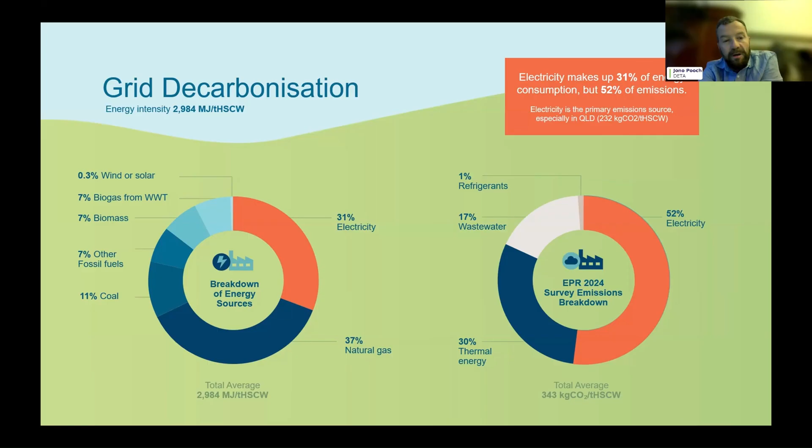If we look then at that breakdown of the thermal, a lot of that is natural gas and coal, but we do have some renewable sources as well through biomass, biogas, and wind and solar. What we've seen over time is that renewable portion is growing all the time, but obviously there's a lot more work to do.

From a sector performance, how we've performed over time, it's actually a really good news story. Over the last 20 years, the average emissions have reduced by around 45% per unit of product. That's a great outcome - it's something that we don't actually talk about very much, which again references the need for us to communicate this a little bit better to our key stakeholders.

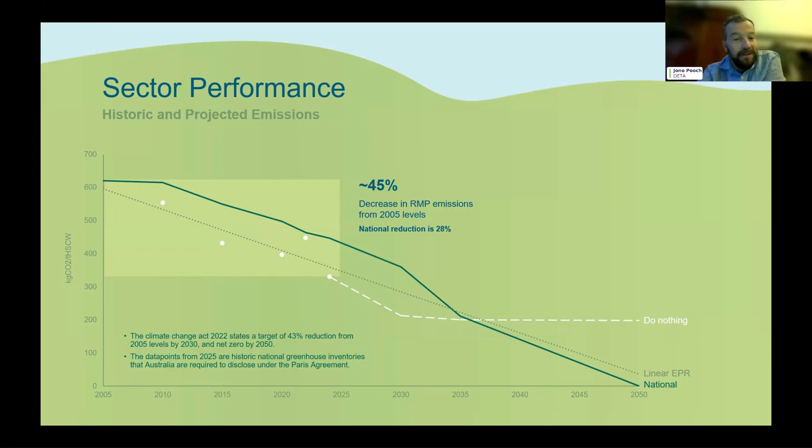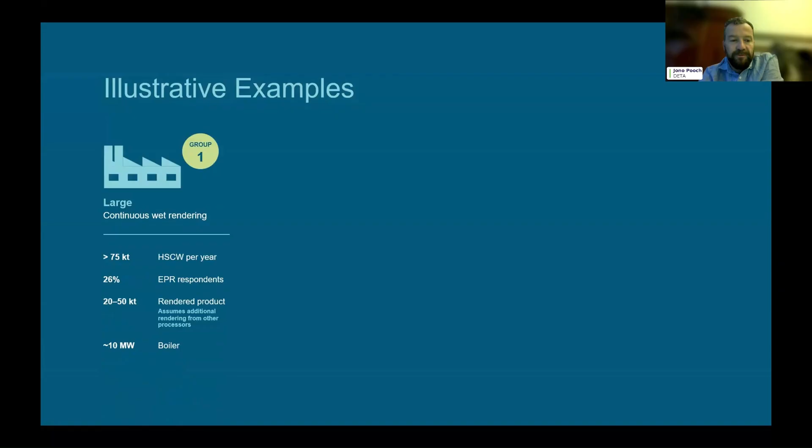Going forward, if we do nothing else around efficiency or process change, we will see some further improvement, mainly from the greening of the electricity grid. But what we are also showing is that just doing nothing, not surprisingly, is not going to get us all the way down to a net zero future. So what we're trying to do is lay out what those steps should be for different process users to get to net zero by 2045 or 2050.

So what we've done is we've basically split the industry into four key archetypes, as we've called them. We've got a large archetype, which is continuous wet rendering, more than 75,000 tonnes per year of production. It covers around 26% of the industry, or the responses that we get from the industry, and they've got around a 10 megawatt boiler. We've got a medium batch rendering type size, around a 6 megawatt type boiler, covering around 44% of the industry or responses. And then we've got medium, and then we've got small.

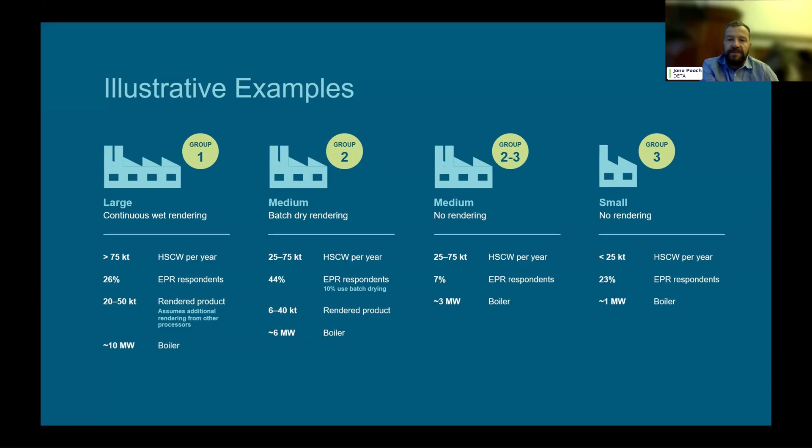As you can sort of see, what we've tried to do is not necessarily say this is a specific roadmap for a specific site. What we've done is bundled sites into four, and then hopefully from a reader perspective, they'll be able to identify with a particular site that suits them, and then follow that through in terms of the recommendations and the thoughts and the technologies that we're thinking about, that we've kind of surveyed and weaved into the roadmap.

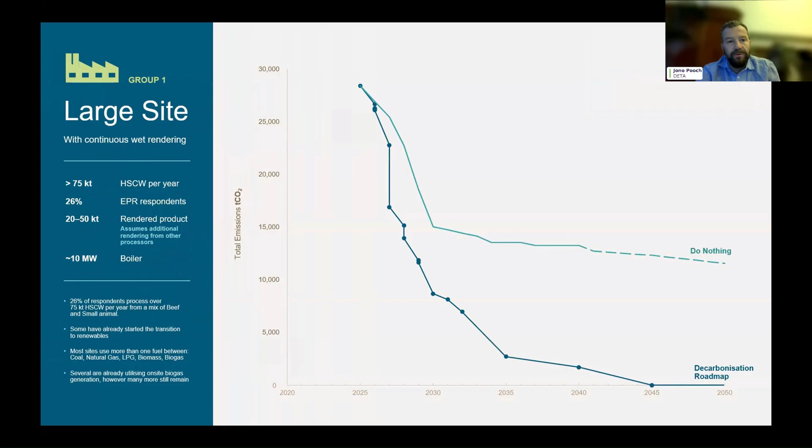So stepping us through very quickly - I don't have time to look through all of the sites, but if we start with a large site, this is where they've sort of sat at the moment.

And what we've done is we've banded this darker blue line, which is what we can do with the decarbonisation roadmap. Phase one effectively is: what is your efficiency foundation? Some sites will have done this already, but there are lots of things we can do over the next 5 years that have a strong economic return, with less than a 5 year payback.

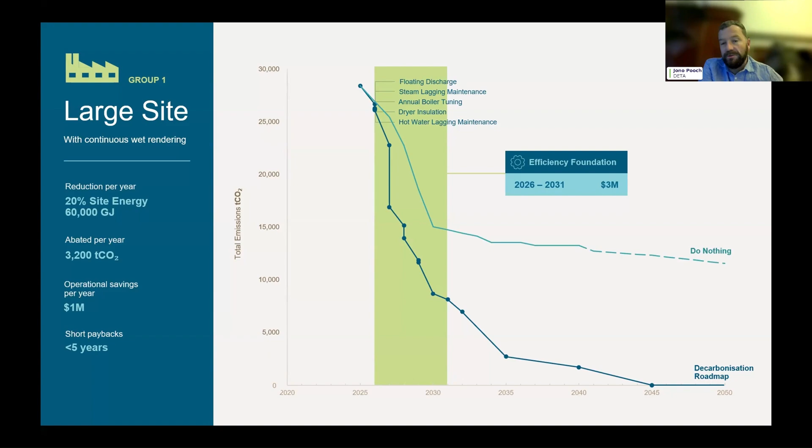Things like floating discharge, lagging, boiler tuning, insulation of dryers, maintaining steam traps — all of those sorts of things. They're very fundamental, very simple, but also have a very short-term payback. Some sites will be doing well in some aspects of this, others will need improvement, but the main focus here is cost efficiency, not emissions reduction, because this is the basic stuff we need to be doing right now.

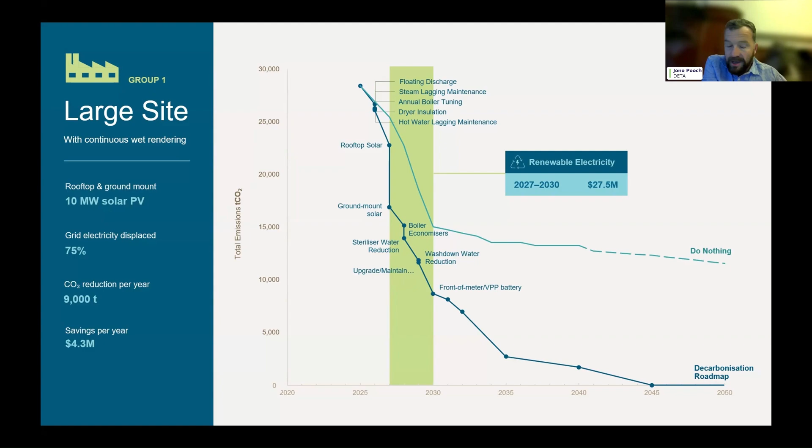Coupled with that, through to 2030, we've got this option around solar, particularly right now. The solar proposition is incredibly strong with some support from government, VEECs and those sorts of tools, which allow the economics of solar — be it through a PPA or on-site solar — to look really attractive. That really drives down the overall emissions on the electricity side particularly.

From what we're seeing in the economics and energy pricing going forward, thermal fuel switching generally will come a little bit later. The triggers for thermal fuel switching will be: do I need to invest in my boiler system anyway? If I am investing in that boiler system, that might bring the timeframe forward. But in the absence of a need to spend big money on a new boiler, the economics would drive you to look at that boiler in the mid 2030s, and look at heat pumping, biogas generation.

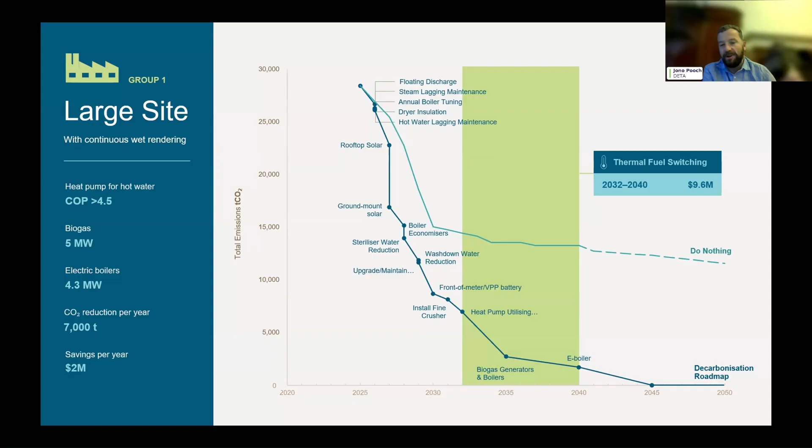And then that final step would be the e-boiler potentially as well. Some of the heat pumping might drift a little further forward in terms of timing, but what we've tried to do is stage this in a way that is investable over time for processors. It's not like we can just click our fingers and do all of this work and get all of this capital deployed purely for decarbonisation in one go. We've tried to stage it over time, and different processors will be on different parts of that journey depending on what they've done previously.

And then that last little bit is to look at offsets, purchasing offsets for the remainder. But at this stage, with the economics we're seeing, we wouldn't suggest that until sort of the 2040s. So if we look at the overall for a large site, the total investment would sit at around $40 million — a significant outlay. However, the annual savings at current energy prices would sit at around 7 million, giving a net payback of around 6.2 years.

Now, that's 6.2 years. It's not terrible, but it's not amazing, and it's not immediately investable necessarily in the whole thing. But this is where, when we get our timing right, that payback gets better and better over time, and we would be looking at it being net zero by 2040 to perhaps 2045.

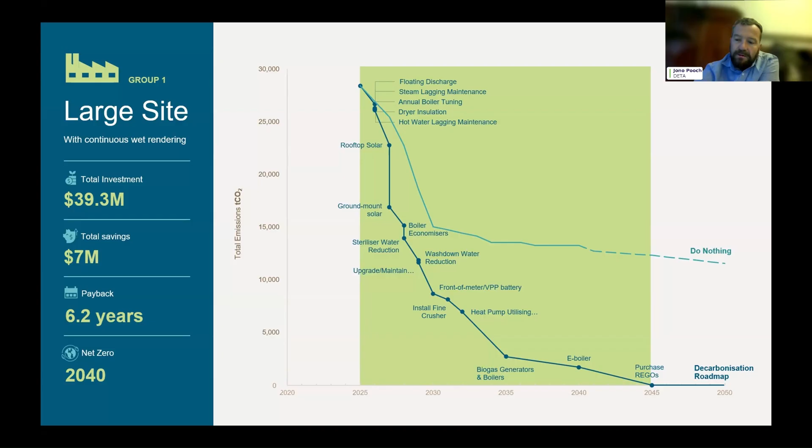Now, what we've done is we've got these sorts of examples for all of our 4 different archetypes. We've got a detailed outline of the different technology that's available and recommended at each step. And hopefully what it does is provide a blueprint that you can follow or challenge, or use with your advisors to test your own plan and develop your own plan from.

Sorry, I've missed the slide.

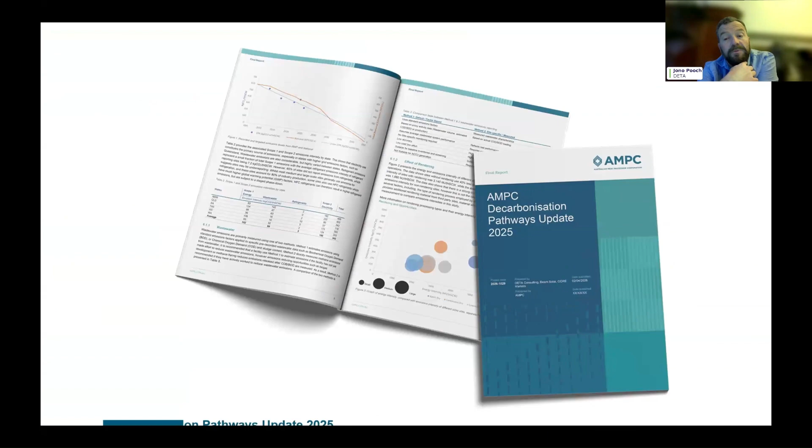So the total investment over the sector would be around 1.2 billion, net zero by 2045, and all of those cost-saving initiatives would provide NPV to the industry of around 540 million. So pretty significant, but again, 1.2 billion is a massive deployment of capital that does need to be staged and deliberate, and invested proactively rather than reactively where possible.

So that's all I've got time for. This report is coming out, it's not far away at all. Hopefully what you'll find in there is something that is quite specific and quite detailed for you. And this is really just a snapshot. Happy to take any questions.